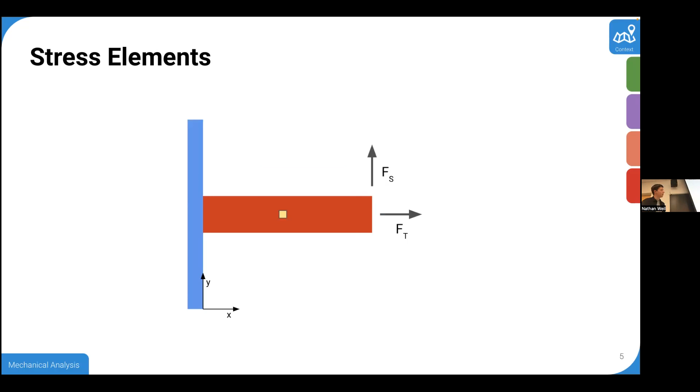So hence the small square there - that's going to be our stress element. We're going to zoom in on that real quick. So here's our stress element, and you can see those forces carry over - that tension force and that shear force both carry over into that stress element. Does that make sense? So we're basically looking at a tiny beam within the big beam.

And the important thing is the stress elements - people never really describe their size other than the word infinitesimal, so basically zero width, but there are applications in which you want some width, so we'll get to that on Thursday. Basically super small, negligible distances basically, so we're looking at basically a pinpoint. The way I kind of think of it is like a finite element - you're just one very small section of a larger piece, so you can use it at different locations to find different answers.

So in order to, because this whole system is in equilibrium - like beam bending, we're seeing it's a static problem, right?

So in order to balance this, we need to add equal and opposite forces on the other side. Now the forces are balanced, but we have a force couple, right? Right now it's about to fly off the page and spin off like a helicopter. So in order to balance that, you have to add the other two shear forces.

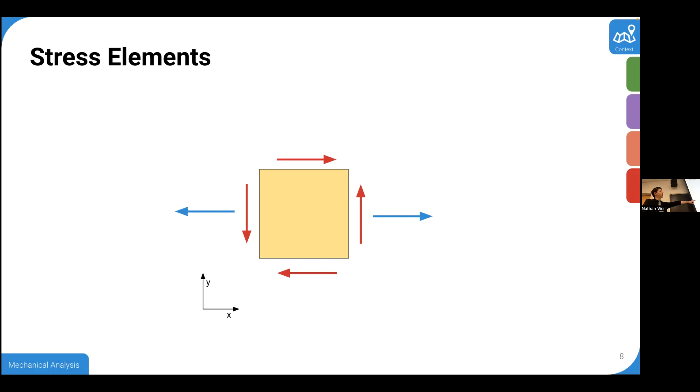That makes sense? The other two possible things would be the loading in our case for the little beam, but the other two possible are the normal stresses in the vertical direction. So basically the blue stresses are normal stresses. Like always, these are the same stress, right? These are the same thing acting in the opposite direction of this part pulling it. And then this is also the same force, going this direction, so it's basically one and the same.

So basically in stress elements, it's not even really thought of that way. This is like basically a free body diagram for this tiny square. It's not usually thought of that way. I don't know, it's really weird. All the stress element stuff and stress transformation stuff is all very abstracted away from normal mechanics, so I'm trying to ground it in something that's kind of funky.

And then you have these 4 arrows, which are all the same value, and that's all your shear stress. So basically the 2D state of stress for this body is given by this matrix right there.

We're not going to do any kind of matrix stuff today, but we might on Thursday, we'll see. And then of course, the really important thing with this, you have to define your coordinate system, because everything starts getting weird and changing.

Does everyone understand how the subscript works on shear stress and how you label which one you're thinking about? This was super confusing for me for a long time. In some cases, you can get away with just saying they're going to be equal to each other. The way that we do it, if I grab that 2D stress element, again, as Nathan said, it's critical that you actually label out your coordinates here.

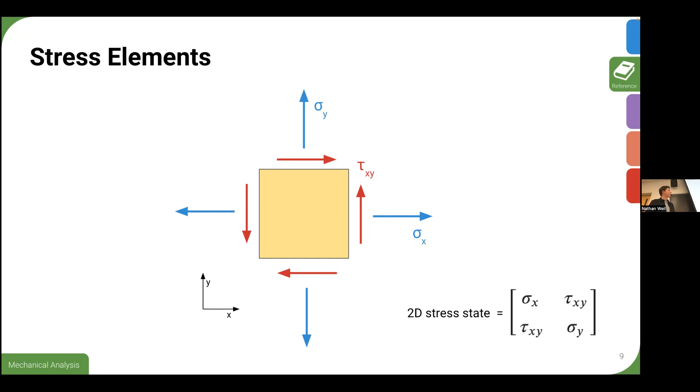What was the bottom one? So the bottom one is the same, it would be YX, but it's the opposite direction. That's a good thing to note actually, the sign convention, this is the sign convention. Oh my gosh, the bouncing sprites.

Yeah, so this is positive, this is positive, this is positive, this is positive. So if your shear is going this way, that would be negative. That makes sense.

Yeah, so that's just the arbitrary sign convention that's used. As long as everybody uses that, everything plays nice and makes sense.

Wait, sorry, go back. On the bottom right, both of the bonds are positive. Both of the shear stresses are positive.

Cool, okay, so here is kind of the classic example that people like to use to put shear stress or stress elements and stress transformations into context. So the classic thing is to have two beams connected together, loaded in tension, with an angled bond or weld or some kind of connection between the two at an angle that has different mechanical properties. So like a weld has different mechanical properties because it changes the heat treat, basically.

It could also be like epoxy, or basically some kind of bond or weld that has different mechanical properties than the other two parts of the beam. And that is at some angle theta from vertical. In this case, it's 20 something degrees.

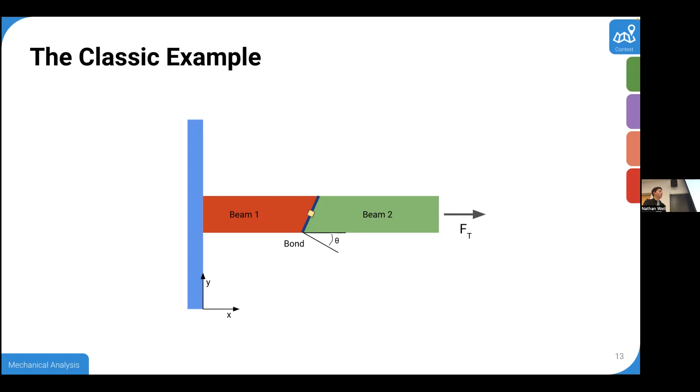That makes sense? So the reason you can't just take the components is it won't tell you about the shear. It'll tell you about the normal stresses at the joint, but not about the shear at that joint. So you can't just take the components of the force, if that makes sense. That's why this is key.

So in our case, these are our coordinate systems. There's different ways people like to do this, but generally the way I like the most is y prime and x prime. There's also n and t, like normal and tangent. Different people use different ways of doing it, but x prime, y prime is the way I kind of like.

So all we're going to do is take our stress element and rotate it by the angle theta. And then we're going to use some equations to calculate what those new stresses are based off of these stresses.

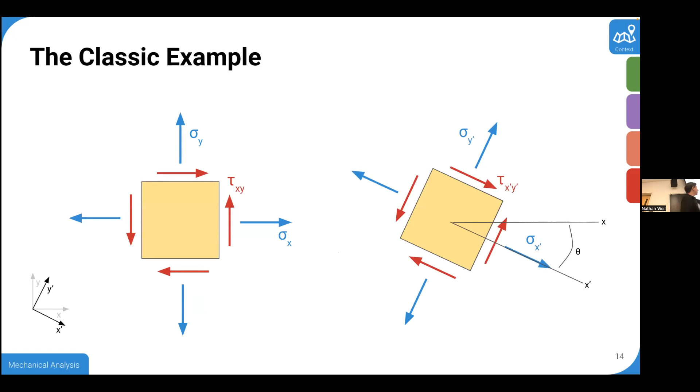They're going to be on the next couple slides too, so you don't necessarily have to copy them all down, but be aware that these are here. There's also a formula sheet at the end of this slide deck that has all the equations from today—there's a lot of equations. Next class, we're going to show you guys a way that's a little easier, not easier, just less equations. Yeah, all the equations are listed at the end of the slide deck too.

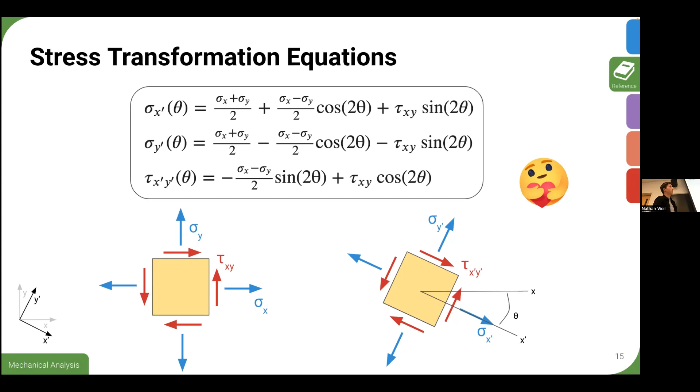Okay, I'm going to add some numbers to this now. I arbitrarily defined the tension load as 1,000 pounds, and defined our little bar as 1 by 1, so it's convenient because it's basically 1,000 pounds per square inch, or 1 KSI. And I defined our angle theta at -25 degrees. So if you'd like to do your first transformation problem, go ahead and run these numbers through. My favorite way to do this is Desmos, just because it's easy to see, but feel free to choose whatever you want.

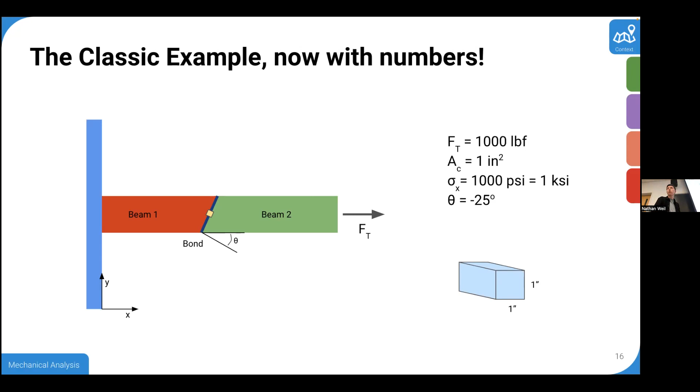You shouldn't necessarily need anything from the previous slide because it's kind of translated for you here. So from the previous slide, the original orientation of the stress element is going to be: there's nothing pulling it in the vertical direction, because we're in the middle of the beam, there's no forces up and down, so there's no y normal stress, and there's no shear stress because we're in pure tension. So our x component is going to be 1 KSI. That should be everything you need to calculate.

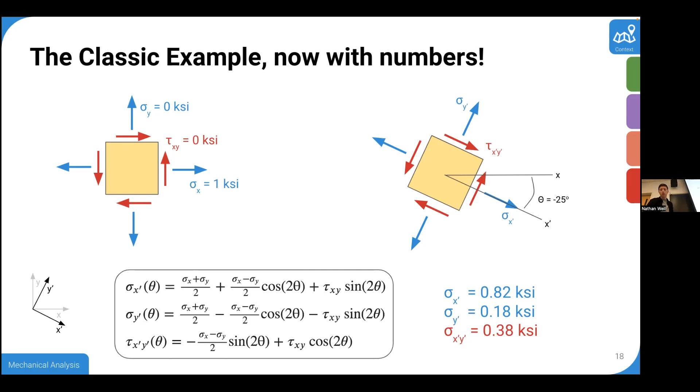What's sigma? Oh, that's the normal stress in the X prime and Y prime directions. So think about X prime as being along the X prime axis. You're projecting normal stress along that direction. Classically this is still valid, but traditionally you can also see that as tau. I think he's asking about the red sigma. Oh, I may have just not corrected it correctly. Yeah, so that's a typo. Sorry, this is tau. It's supposed to be tau. Sometimes some texts will still do it in that direction, but a lot of them will switch to tau just to really delineate this is shear stress. But technically this is still tau, that's just the middle one.

Probably, yep. Alright, I'm gonna make a note of that to correct the typos. My bad, sorry. Yes, thank you for typo catching. You've been good at typos this semester already. What slide is this? This is slide 21. I know. Compliance check. Yeah, good catch, thank you.

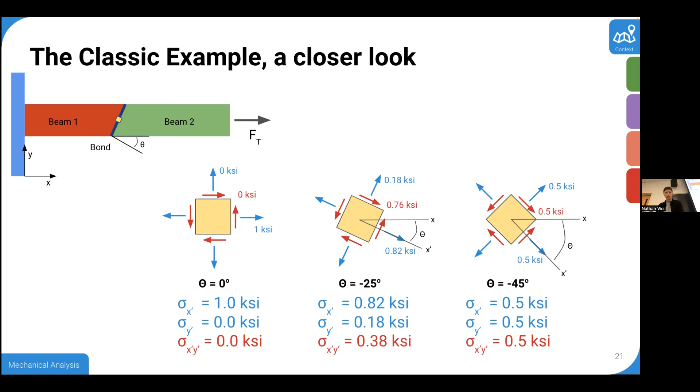Cool, so now we're gonna watch a little bit of this video. This video is really helpful for building a little bit of intuition around this. We're not gonna watch the whole thing, but we're gonna watch a little subset of it. Efficient Engineer, really good. I'm gonna rotate a little bit so I can see better.

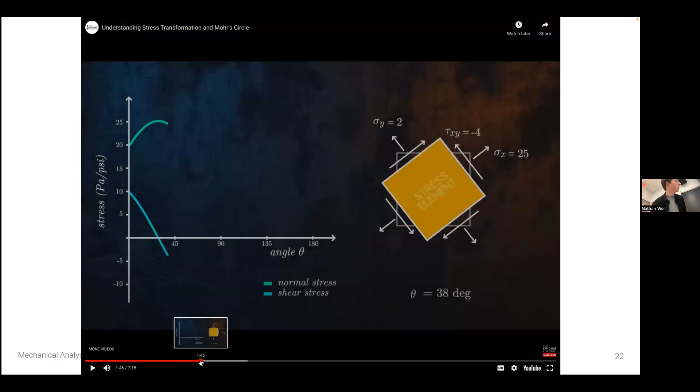Okay, so basically the setup here is he gave this initial condition. There we go. So he gives this initial condition, right?

So we have an initial condition of a stress state over there, and then he's going to rotate it. As he does that, he's going to plot the normal stress in the X direction, or whatever the current X direction is, and then whatever the shear stress is at the same point. Does that make sense?

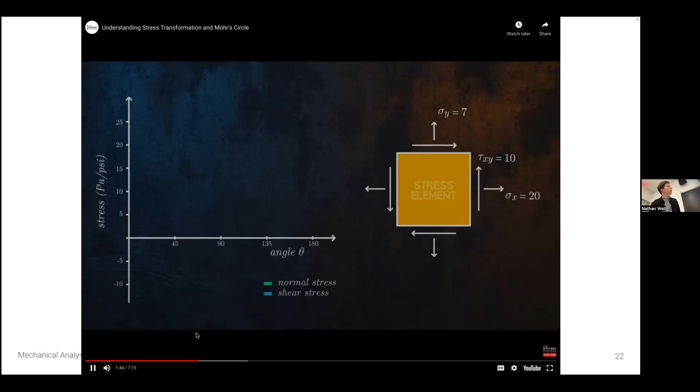Okay, so as it rotates, you can kind of see that relationship. There you go. So a couple important things to note about this. I think he's going to go into it right away. So like we just said, this rotated 180 degrees, and that gave a full sweep of all the possible stress states, right? Because they're equivalent, rotating 180 degrees gets you back to the equivalent.

The graph of the normal stress is in the x direction. So this normal stress is not labeled here, but this normal stress is sigma x. Sigma y isn't labeled, but it would be a similar swoop with different magnitude. It also has a different phase shift, but you kind of see there's a phase shift between the normal stress and the shear stress, which makes sense.

Like if you go back to thinking about the other example we had, when that weld seam was vertical, when our stress element was vertical, maybe there was no shear stress. So that was kind of like here, right? Because we had no shear stress, but a lot of normal stress. And then when we rotated it a little bit, we're kind of here in the middle somewhere, we have a little bit of both. And then when you rotate it to 45 degrees, we're at this point, right? So we have a little bit of normal stress somewhere in the middle, and then we have the shear stress, which is our peak shear stress, right? And then we can go on from there, but that kind of makes sense.

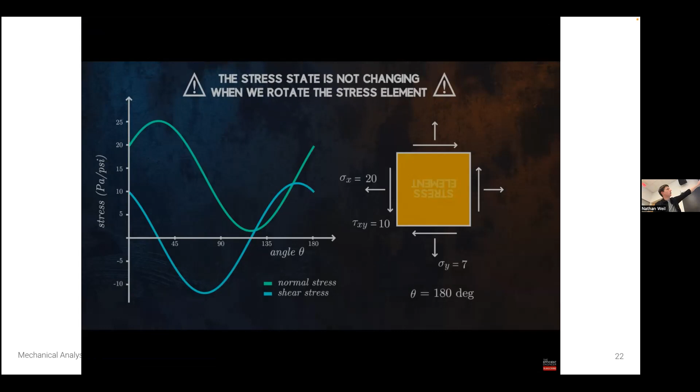So, okay. I think he labels these real quick. Right, the stress state is not changing. The stress element and the normal and shear stresses are changing, but the overall state of stress in the part is not changing.

Skip ahead a little bit. There you go. So you can see that the peaks between the normal stress are 90 degrees apart, which makes a ton of sense, right? Because we're rotating a square, and every time one of those faces lines up with our tension force, that's going to be a peak. Same thing happens no matter what load case you're talking about, or orientation, it's always going to be 90 degrees apart between the peaks, if that makes sense.

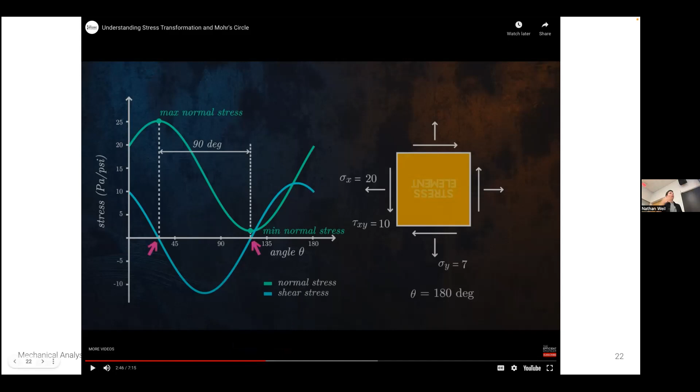Anything else? So basically, when the shear stresses are 0, you're going to maximize your normal stresses, and these points are called the principal stresses. So this is maybe the most important thing out of stress transformations: principal stress. This is going to be used later on. It's used some on FEA, I don't know, I've never done it in FEA, but it's definitely a thing. We'll get to that later, but we use principal stress to calculate your von Mises stress, and Tresca and everything.

Big fireworks glaring, yes, get out your highlighters. So not enough emojis on this page. Yeah, this is super key though.

And the cool thing about this is no matter what orientation you start with, say we're dropped into the other example at some weird angle, you can find the principal stresses by using these equations. You can find the angle that occurs in that equation, no matter what starting parameters you're given.

And then by convention, the largest, whatever, so there's a plus or minus here, right? Whatever the larger one is going to be sigma 1, and then sigma 2 is going to be whatever the smaller one is. How's that feel? Make sense to everybody? Cool.

Yeah, big fireworks and things. Yeah, cool. So I have you guys calculate it for that practice problem we have.

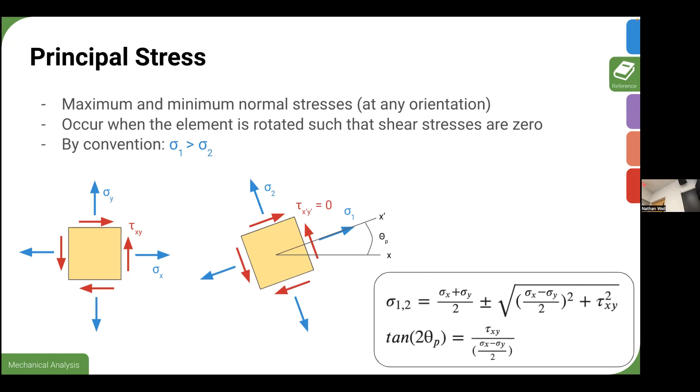So in this case, this is sigma 1, because it's your peak, and this is sigma 2 because it's the smaller magnitude. So it doesn't matter, the plus and minus in that equation doesn't matter. That does not control the 1 or 2. Only the magnitude controls the 1 or 2. So you just got to calculate both and then figure out which one is which after that.

With the normal stress one, that would be like adding those together, and whichever is bigger. So basically, the way I've seen it in videos, the way I do it is you just write the two things down, 1 plus 1 minus, or do it in calculator, and then whichever one is the larger value is sigma 1.

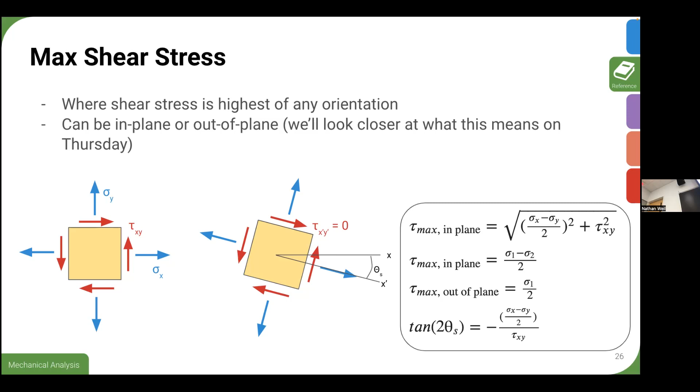Cool, all right. So we're gonna do the same thing again—go back to our classic common practice problem. You guys are going to calculate the max in-plane, the max out-of-plane, which should be like three clicks in the calculator, and then figure out what angles they occur at.

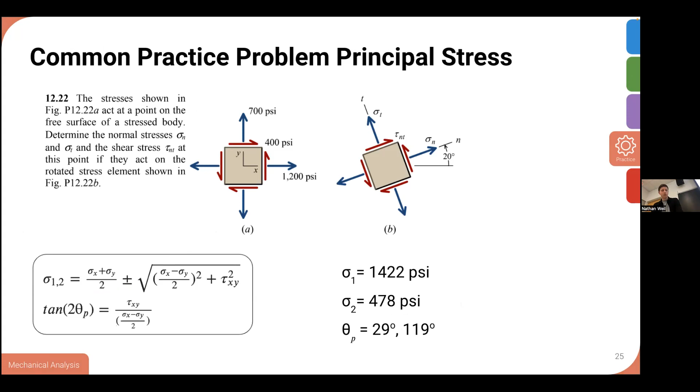So if you note that 16 and 74—wait, hold on, yeah, there should be out of phase by some amount. I don't know, I'm not gonna think about that too hard right now.

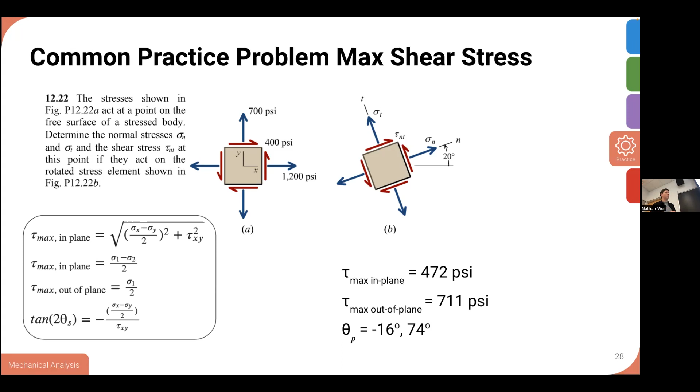So this is basically all the really big fundamental things about stress transformation. There's a lot more nuance and fine detail and ways of using it that we'll get into on Thursday, but I want to leave it here for now and let this sink in, making sure you have a really solid grounding in this. This makes sense and isn't very hard—it's mostly plug and chug. The really hard part is how to apply this to actual things, so we'll get to that. For now, we're gonna leave it here and let it settle.

So one quick peek into what we're gonna work on Thursday: 2D stress transformations and stress elements might seem like they're only good for fictional 2D problems, but they can actually be really useful for 3D problems. It turns out when you have a free surface, there's not going to be any normal stress in the plane that's normal to that surface—nothing pulling on that free floating face. So you can actually apply it to the edges of things, to surfaces.

One of the problems we'll look at Thursday ties this together—like if you're twisting a beam, like twisting a piece of chalk like Carlos did on the very first day, it breaks at a 45-degree angle. We'll see why that is, and it has to do with this. And also, for a flat plate with some thickness and no loads on either side, you can use it for that too.

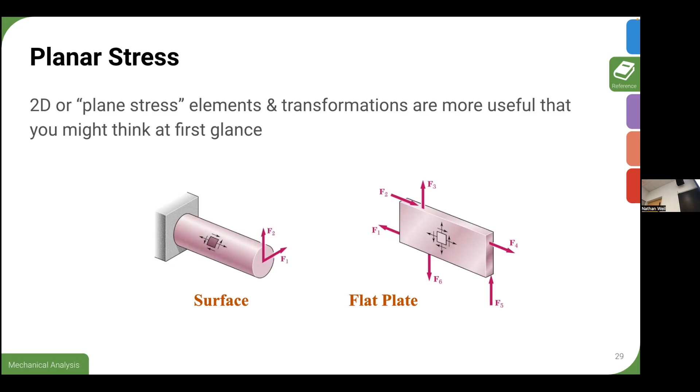And then we're also going to peek at 3D stress transformations, because adding a third dimension makes it more exciting, more complicated. Some people do 3D stress transformations by hand—this is disgusting. It's supposed to look disgusting. But we're not doing this by hand—we're going to show you the cheat code. It's going to be fun.

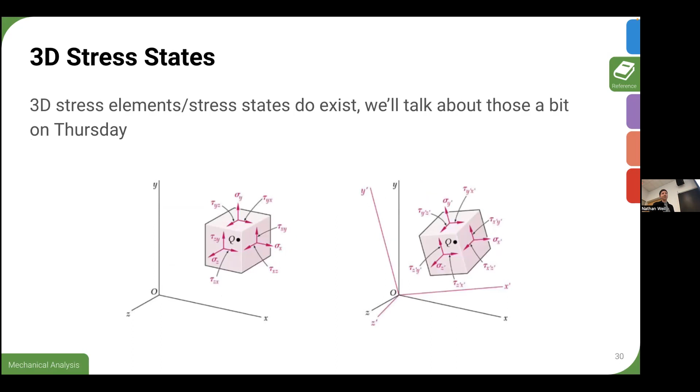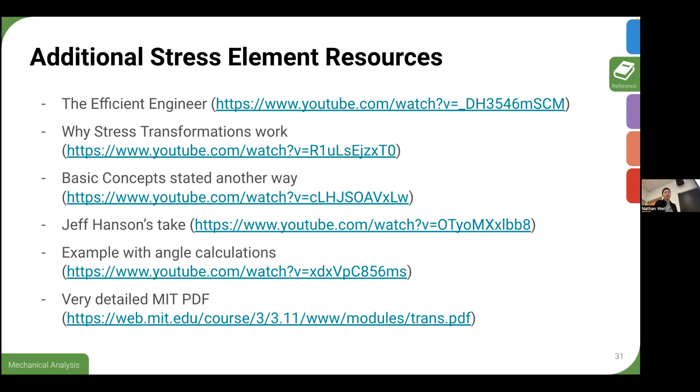And then here's that formula she was talking about. So this is all the equations from class today that could be useful.

So we're going to chat real quick about Thursday. You might have seen Katie's Canvas update. The plan is we're going to be doing kind of a gallery walk style thing. So if any of you have taken a Tim Sauter class, like 'tell a story,' something like that.

Please bring a screenshot or a physical copy, some artifact of the medium you've chosen for your reference resource, and an option that you looked into and tested a little bit but decided not to use.

Reference resource, what is a reference resource? The reference resource is your final project thing. It was originally due today, but we didn't remind you on Thursday. So now it's due this coming Thursday, next class. There's a thing on it on Canvas.

We'd like you guys to look into this. Katie, you're trying to talk. I think I have you muted. Are you there, Katie? Yeah, I'm here. The audio is really weird on this. It might be more useful just on Colin's laptop. Oh, I better mute.

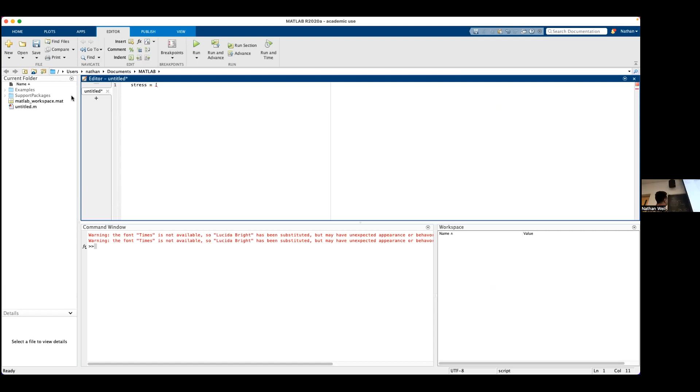I'm just gonna call that stress equals 1200, 400, semicolon, 400, 700. Again, that 1200 is sigma X, the 400 is shear stress, and then 700 is sigma Y. So my shear and normal stresses are on my diagonal. If I run that, my matrix pops out right there.

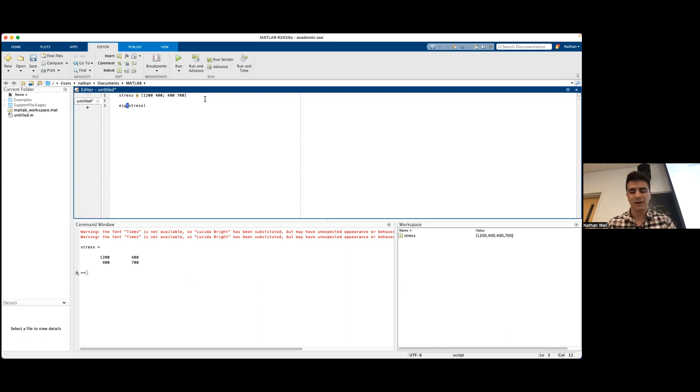That's it. I thought that was cool as hell the first time we did that. You guys will get a far better understanding in Chris Lee's next solids class on why that exists, but that's also a super powerful tool you have at your disposal. I can do my best to try to explain this, but Jeff didn't really spend too much time on it, other than just going like, eh.

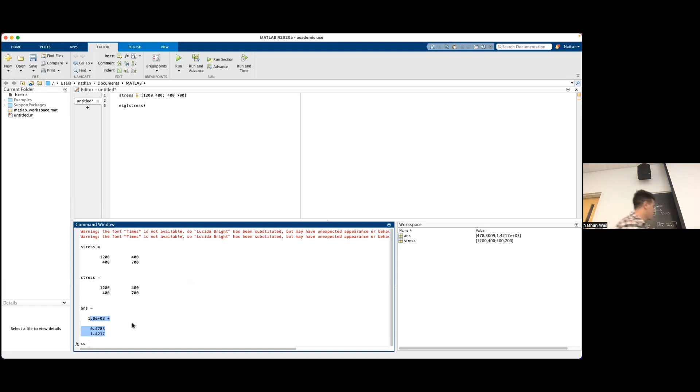What's up, you talked about that matrix? Yeah, absolutely. So, forget projectors, we're going back to chalkboards. I'm gonna call it a matrix.